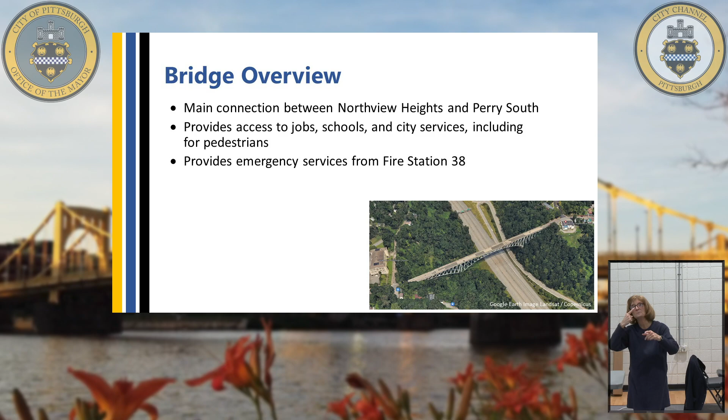So just a quick background before I hand it over to our design team to talk about the project ahead. Just wanted to familiarize ourselves with the bridge, which we're just up the hill from today. A little background: the bridge was first constructed in 1930, so it's 95 years old. It is eligible for the National Register of Historic Places. Bridges can be historic, and that does guide the design process, as the team will discuss in a little bit. The most recent rehabilitation was in 1990.

So that means we're about due for another one, as you can probably tell as you're using the bridge. We've been out there the last 3 or 4 summers now, repairing different steel beams underneath the deck and repairing the deck. We recognize this has not been comprehensive. There's a lot more to be done, and you'll see that this upcoming project will address all of these concerns. So with that, I'm going to turn it over to Nick Burdett from HDR.

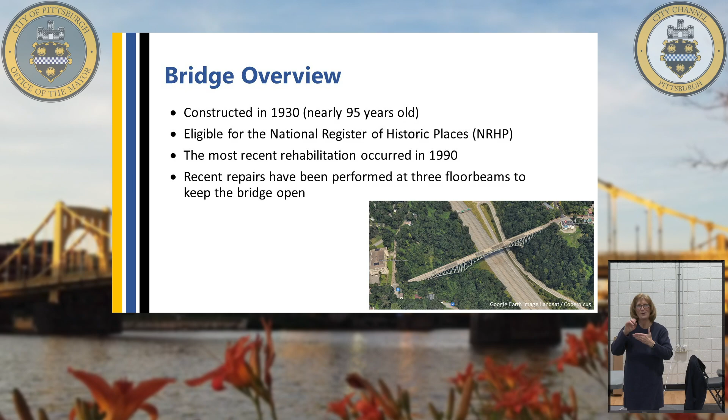They're the lead consultant for the project. Great, thanks, Zach. Yeah, we're excited for the opportunity to share a little bit about this rehabilitation project. I'll say a little bit about the existing bridge and then our plans to rehabilitate it. So thank you all for joining us here tonight.

For those who are familiar with the bridge, you know that the cross section looks like this shown up here on the screen. We have 2 12.5-foot lanes, and for pedestrians we have 2 sidewalks which are up a bit higher than the roadway and tucked behind the concrete barriers you can see there. The existing sidewalks are about 4.5 feet wide, so it's a little challenging to pass somebody if people are coming in 2 different directions on the sidewalk. But that's the existing cross section of the bridge.

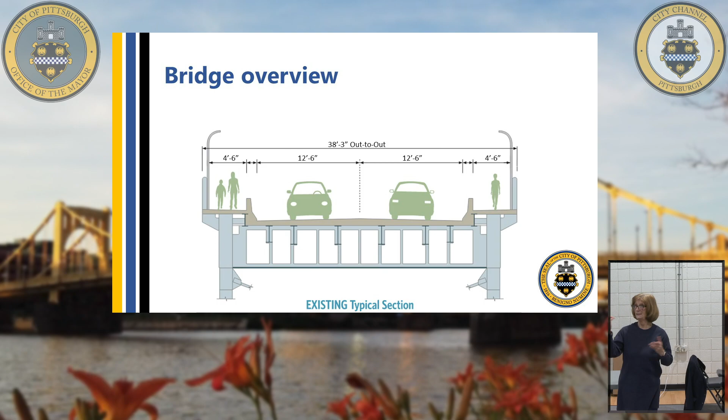And of course, the reason we're here tonight is because that bridge definitely needs this rehabilitation project. The bridge is safe, it's open to traffic now, but it does have some ratings that lead us to recognize it needs to be rehabilitated. The overall bridge superstructure, the elements above the bearings like the steel trusses and everything up above that, is rated 3 out of 9, which is considered a serious condition. And the bridge deck is in poor condition, rated 4 out of 9.

As probably everyone here has driven across the bridge, I don't have to talk to you about spalls and exposed rebar. It's been patched, but the deck is reaching the end of its useful life. We have some leaking joints, many of which have been replaced but have leaked at various points. And the drainage system has plastic pipes that take water from the bridge deck down to the ground, and many of those are leaking, which results in corrosion of the steel and the need to fix that drainage system.

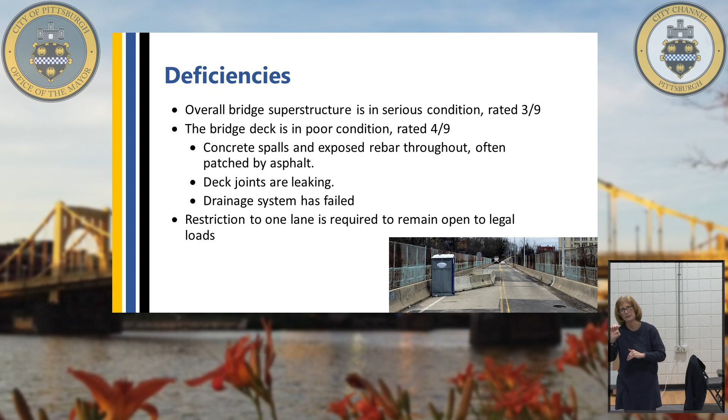I'm sure you're aware it's currently restricted to 1 lane, so this photo shows a restriction. There's some barrier just over one portion of the bridge because one of the floor beams, members that run across the bridge, has some deterioration over on the left side. So keeping traffic off that portion of the beam, traffic is restricted down to this 1 lane to be able to remain open to legal loads, which it is today.

So the purpose of this project, what do we want to do here? In a nutshell, we're going to bring the bridge back to full working order for all modes of transportation. There's an official statement down below. As part of the federal process for rehabilitating a historic structure, we have a purpose and need statement. I'll just highlight the last sentence there: we're very aware that this bridge carries many modes of traffic, and all of those need to be accommodated by the new structure.

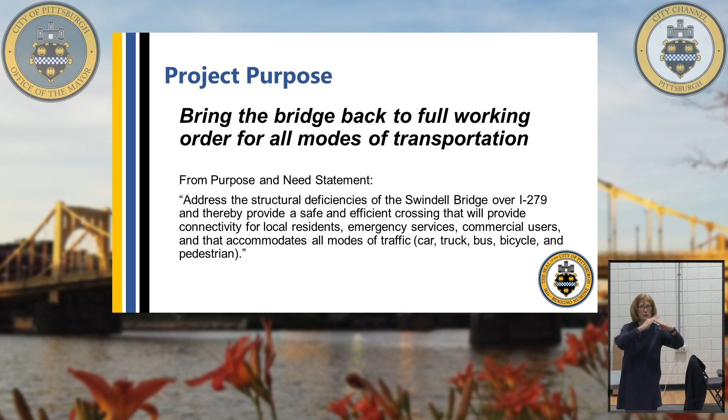So just walking through the major scope of work, the main items we're going to do as part of this rehabilitation. The first is to address that deck. We're going to replace everything on top of the bridge that you see when you cross it. We'll replace the deck where the cars drive, the sidewalks, the bridge barriers, the deck beams - those are called stringers, the steel beams that run along and support the deck. Those will be replaced, as well as the lights along the top of the bridge.

We'll also repair any of the deterioration on the steel below the deck. The truss and the different members will be repaired, and we'll repaint the entire structure - quite a paint job, but we'll seal and protect it so we have a paint system that's going to last for decades. There's 5 bridge supports shown here encircled in red, and we'll address any issues at all those locations as well. There's some deterioration at various elements, spalling concrete and a few things that will all be cleaned up and rehabilitated. We'll also replace that drainage system with steel pipes that will not leak.

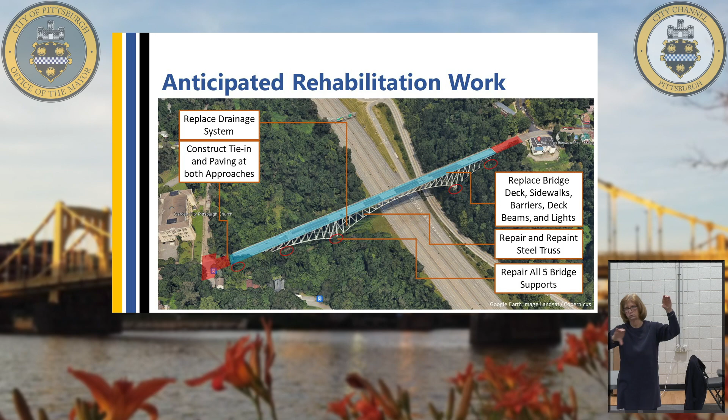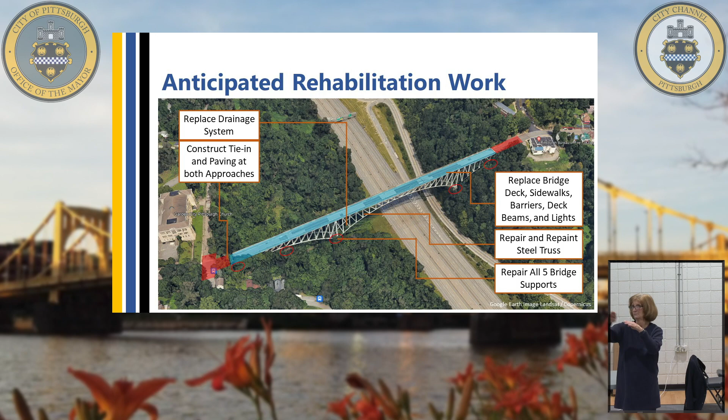And then finally, we're going to have some tie-ins. The bridge deck will be raised about 6 inches to make it a little thicker and put down a modern bridge deck. So we need to tie that back into the roadway on both ends. There'll be some paving, probably some new inlets, and work to just tie everything together so it's a smooth transition from the roadway to the bridge.

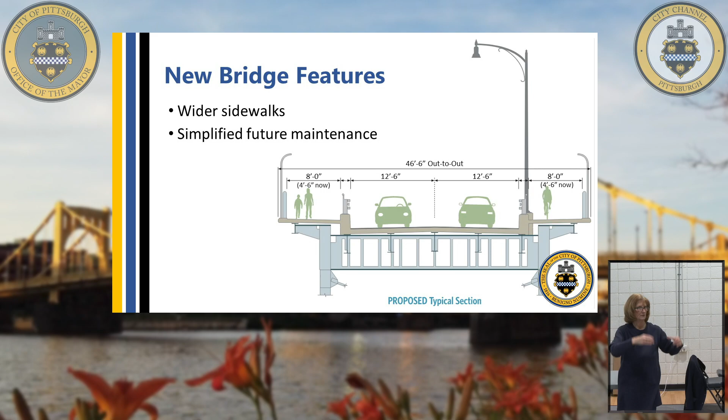We'll also be adding handrails on the back and putting in modern open steel barriers that will replace the concrete barriers that are there now. The roadway should stay about the same, still 12.5-foot lanes, very similar to what is out there today, but no potholes.

To do all of this work and completely replace the deck is obviously a significant undertaking that is going to influence the bridge's use. Because the bridge is so narrow and so high, we do have to have a full vehicular closure during that deck work, so we'll be detouring vehicles during the replacement of that deck. We recognize how important the bridge is for pedestrians, for access to bus routes and things, especially on the western side of the bridge. So we plan to keep one sidewalk open at all times so the bridge can still be used by pedestrians.

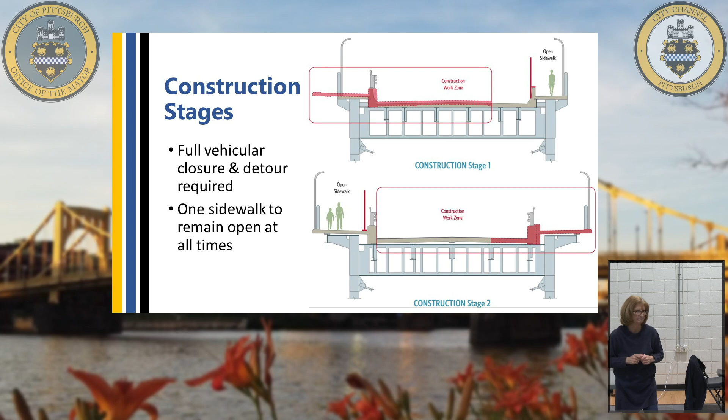The way we are currently planning to replace this deck is in 2 phases. Obviously, the fewer phases you do it in, the faster you can get in and out and get the work done, so we have it down to 2 construction stages. We're going to replace about 2/3 of the bridge in the first phase. The rectangle here shows the work zone where we'll remove the old sidewalk on one side and most of the deck. We plan to put up a barrier that protects pedestrians from the work zone so they can continue to use the one sidewalk during that work.

Phase 2 will be faster, just doing the last third of the bridge, shifting pedestrians over to the wider new sidewalk and finishing out the other side of the bridge. So we place in the new sidewalk and finish the bridge deck to complete the whole thing and open it back up to traffic.

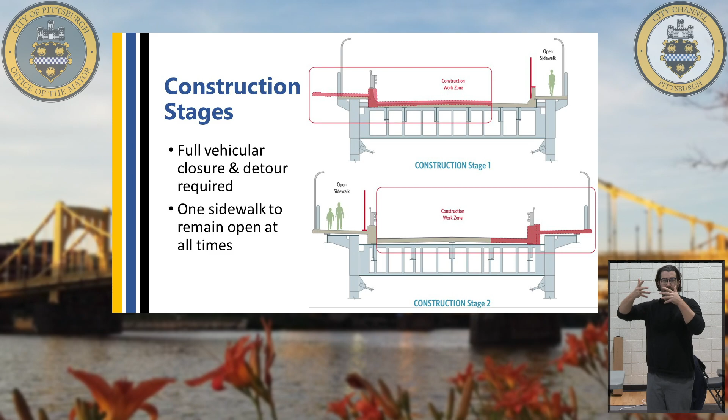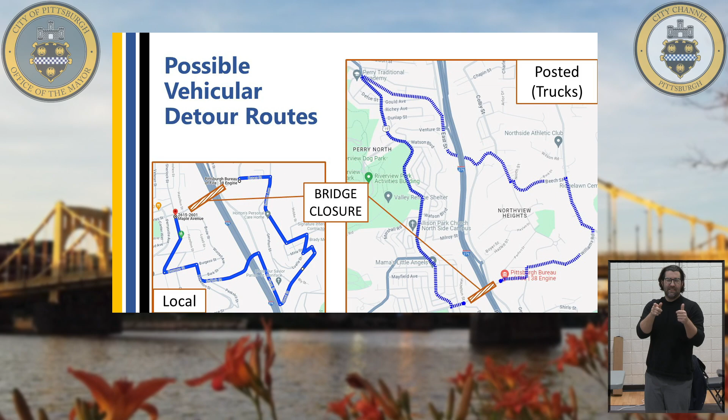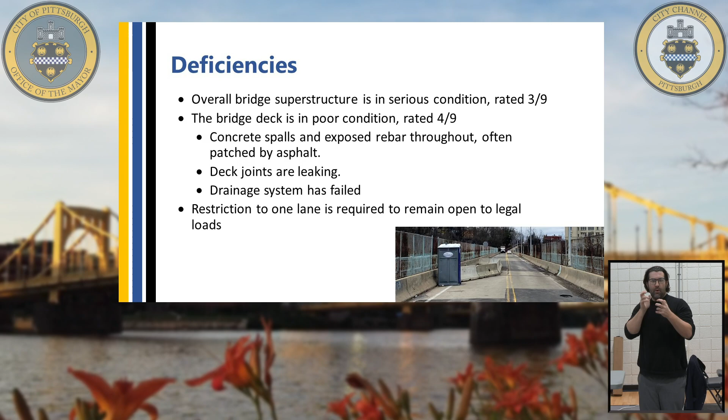I'll go back to a photo of the barrier. It's called a floor beam, a steel beam that goes across the bridge underneath. There's just one right here that has some deterioration on this side. We've carefully looked at this and found that if you keep traffic off that side, this side is adequate. So this restriction is to avoid posting the bridge, which would require reducing the weight the bridge can take for 2 lanes of traffic.

The question was, are we going to repair it and not replace it? This rehabilitation project will take care of all of this. It's going to repair everything. The bridge will be open, both lanes, no issues as part of this rehabilitation. When the project finishes, it will be better than when it opened in 1930. The bridge will be repaired.

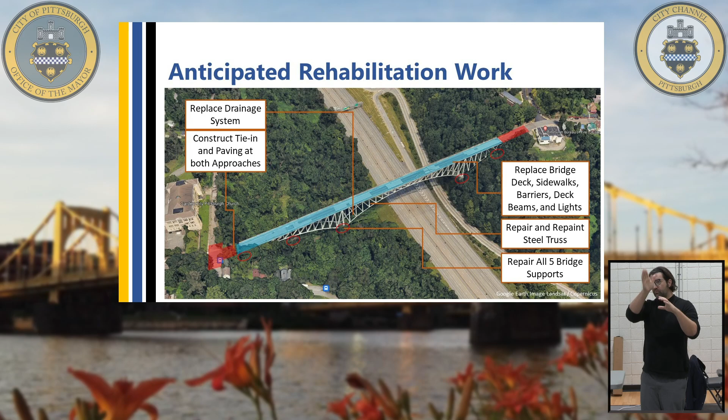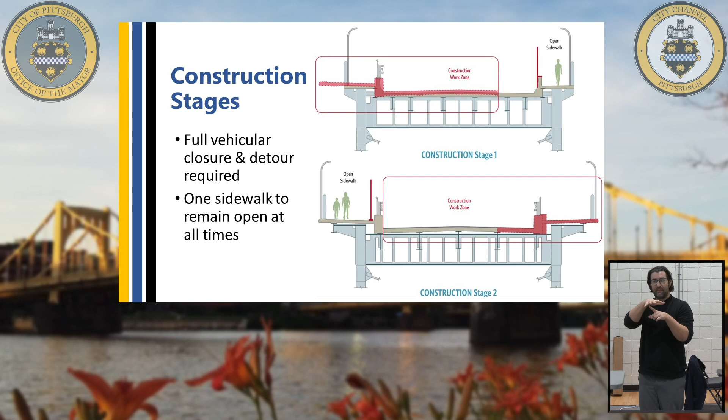The question was, if we close the bridge today, would construction be able to start any sooner? Can you jump to the slide with the staging? Essentially, the bridge will be fully closed to vehicle traffic for the duration of construction. Because of how narrow the bridge is and the types of repairs planned, the contractor will be working in the zone shown in red, which will prevent any other vehicles from using the bridge. They'll have so much equipment of their own out there in one spot while working adjacent, so there won't be any room to maintain traffic.

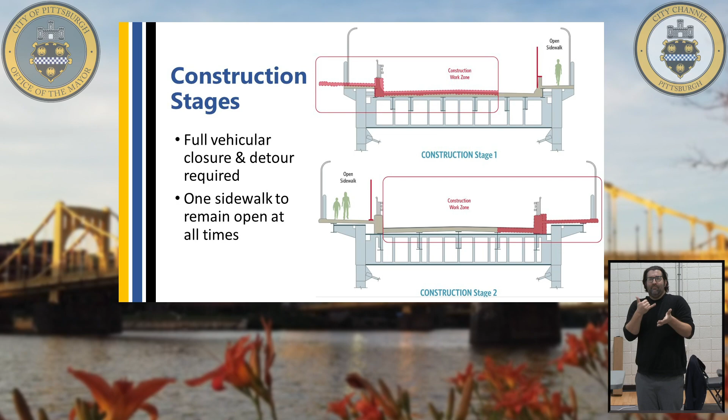We are currently projecting to maintain one sidewalk at all times during construction. The question is, when does construction start? We're currently looking to start construction in spring of 2027. So the question is, why does construction not start until 2027?

The reason is the amount of engineering and environmental reviews that go into getting us to that point. As mentioned, the bridge is historic, so we have to do our due diligence showing that we are appropriately rehabilitating the structure. It's also a complicated structure, so there are thousands of hours of analysis that go into the actual staging. Every single step of the way, the bridge has to be modeled. There's a remarkable amount of work being done between now and when construction begins.

We'll jump over to this side of the room. The question was, will there be jobs for nearby communities during the construction project?